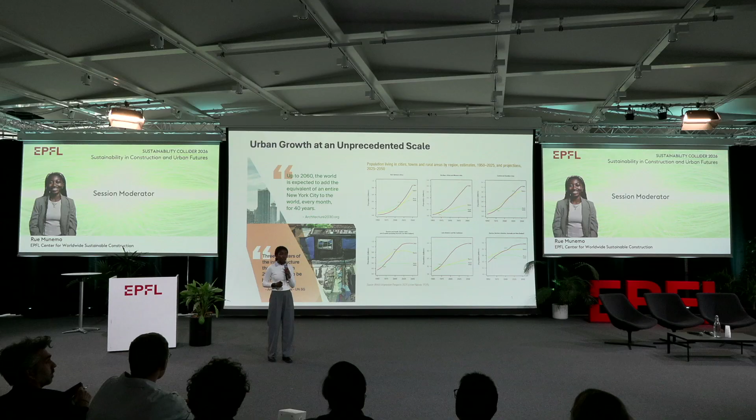The world is entering a period of unprecedented urban growth as well as population growth. At the moment, 50% of the world lives in urban areas, but by 2050 it will be 70% of the world living in cities. That's 2.5 billion additional inhabitants currently not living in cities, meaning cities are supposed to expand to accommodate these new inhabitants. Up to 2060, the world will be adding an equivalent of New York City in floor area every month for the next 40 years.

And 3/4 of the infrastructure that we need to build technically doesn't exist at the moment. And of course, this sounds like a daunting challenge.

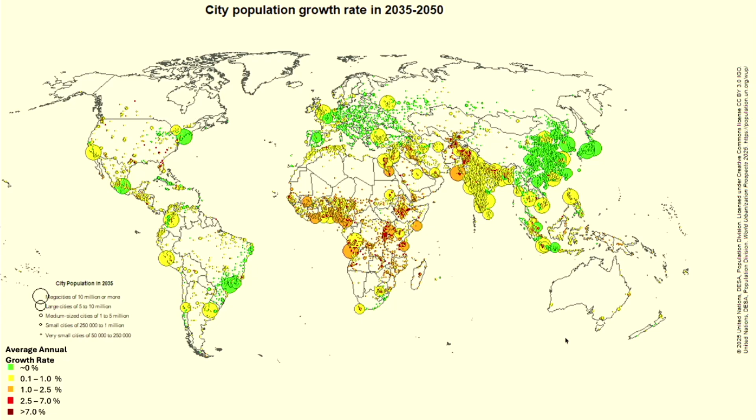If we look at the projected growth rate, majority of the growth will be in emerging markets and developing economies. That's why these conversations need to be two-layered. In developed countries, a lot of urban centers will experience minimal to no growth, so there we can argue build less, build better. But in Sub-Saharan Africa and Southeast Asia, where there's still a lot of growth that needs to happen, these cities still need to build the infrastructure to accommodate additional inhabitants.

So the main challenge that we are all aware of: the built environment contributes 42% of global emissions annually. Just take that in, 42%, whether direct or indirect. At the moment, there's been a strong contribution from operational emissions, which is the energy that goes into buildings.

But if we continue with business as usual, by 2050 the majority of those emissions will be from embodied emissions, meaning the majority of emissions from buildings over their lifetime would have already been accounted for before the building has even been used. Which is why it's important for us to consider embodied carbon just as much as operational carbon as we move forward.

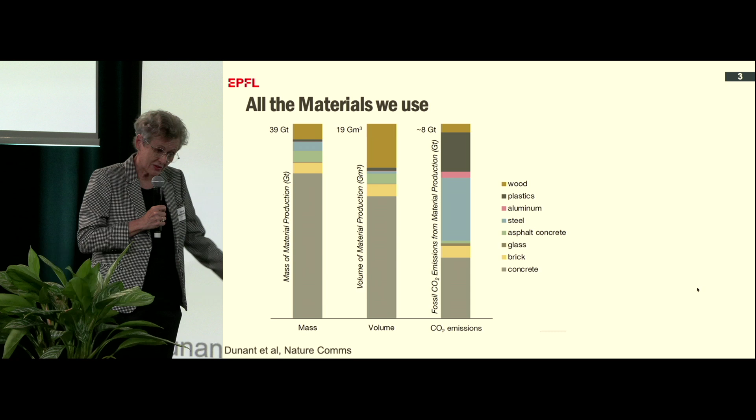And you'll see, even though cement-based materials account for 3/4 of materials, their contribution to CO2 emissions is proportionately much less. It's very significant, but it's much less. And we're not going to help the situation by turning to other widely available materials like steel, aluminium, etc.

Now then people say, well, we have to use more biomaterials, and I'll come back to that point, but the point here is how much can we produce? It's been calculated that replacing just 25% of concrete with wood, for example, would require planting new forests 1.5 times the size of India.

Now, that would be absolutely great, but even if we could do it tomorrow, this would hardly deliver anything by 2050, because typically trees take about 20, 30, 40 years to grow. And then, what's happening here? Yes, okay, then we have to look at where those materials are going to be consumed.

So this is a very interesting graph where we got the data for individual countries and made this plot of GDP per capita, which is like development state, versus cement use per capita. And it's very noticeable that all countries go through this kind of hump in their cement use, and then it comes down again. In fact, if we look back over the past 70 years, the amount of cement we're using in places like Europe has gone down, even though the population's gone up.

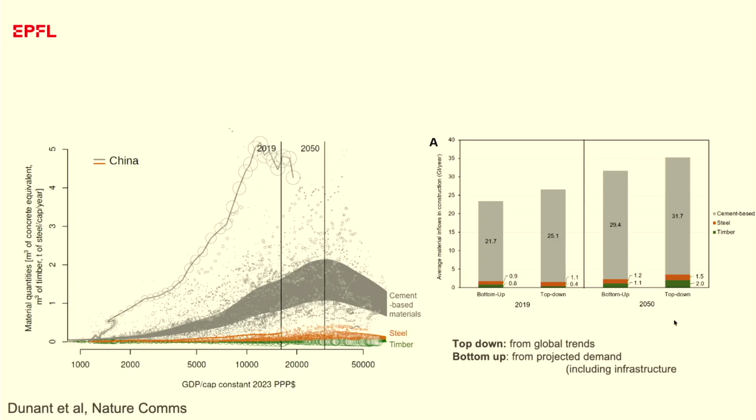This is taken from a kind of macroscopic, top-down analysis. If we confront that with a bottom-up approach based on published data for needed floor area, urbanization, etc., we get this calculation here. And what's interesting is that they're based on completely different premises, but they're pretty similar.

Because we have the data by country, we can see where this demand is going to be. And here you see 75% of the anticipated demand is going to be in regions which now have GDP per capita below the world average - that's to say, developing regions.

So what can we do about it? And here's the answer to the first question: what we can do about it is a lot. Because we have many, many strategies that can all add together to give very substantial reductions.

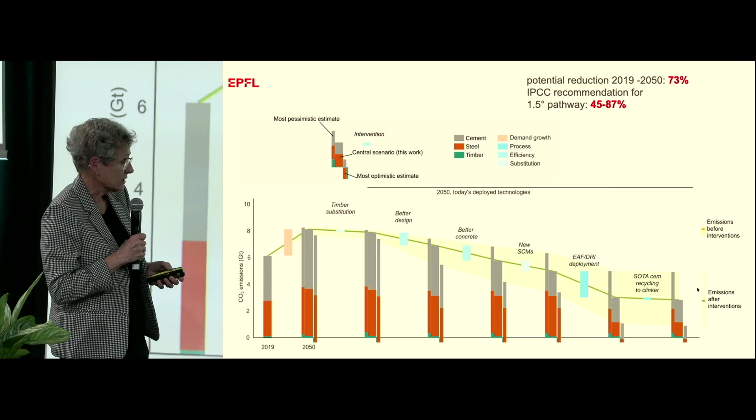A fairly small amount from timber substitution. We can do a lot with better design, which most people picked out. We can do an awful lot more by making our concrete more efficiently. We can do a lot by substituting materials in cement with lower carbon materials. And with steel, we can do a lot by moving away from blast furnaces and switching to electric arc furnaces. And we have this tiny amount from some recycling, but I hope you see that actually circularity doesn't really come in here.

Not to say we shouldn't do it, but this is what can happen in the global north - that's not where the big construction is going to take place. You can only reuse materials if they're already there.

The great thing about this - I didn't highlight it, but in fact here we showed that we can reduce, already by technologies available today, 73% of existing emissions from cement and steel, which is just enormous. And it's pretty close to what the IPCC says has to happen, which is between 45 to 87% in these heavy industrial sectors.

And what's, to me, the most important message about this is we no longer have to say to developing countries, 'oh, we have this global warming problem, so you didn't develop, you didn't benefit from that, you've just got to stay in the situation you are, because it will lead to more emissions.' If we follow business as usual, all these countries which are on the left-hand side of the hump are going to increase their demand for building materials, and in a business-as-usual scenario, their emissions would go up.

But if we implement just three things - better design, calcined clay, and better concrete - then all these countries, even though their GDP is increasing, they're developing, their emissions from cement-based materials can go down. That's a very important message and a very important thing to focus on.

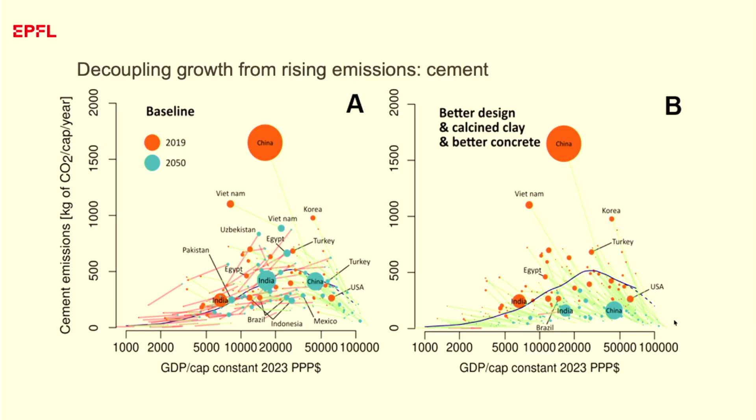One of those things mentioned here is calcined clay. This is behind the cement we developed at the Laboratory of Cementitious Construction Materials here at EPFL. It's simply the substitution of about half the carbon-intensive part, which is the clinker, by a combination of calcined clay and limestone. This has already been implemented in 33 plants worldwide, but the potential is much, much higher.

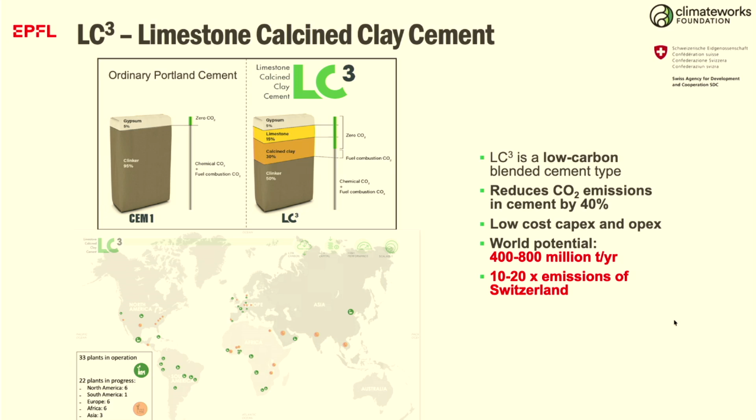The potential is to reduce emissions by 400 to 800 million tons per year, which, to put that in context, is 10 to 20 times the emissions of Switzerland. And that's what we should be caring about, because CO2 doesn't know any boundaries - so where we can have most impact, that's the most important place.

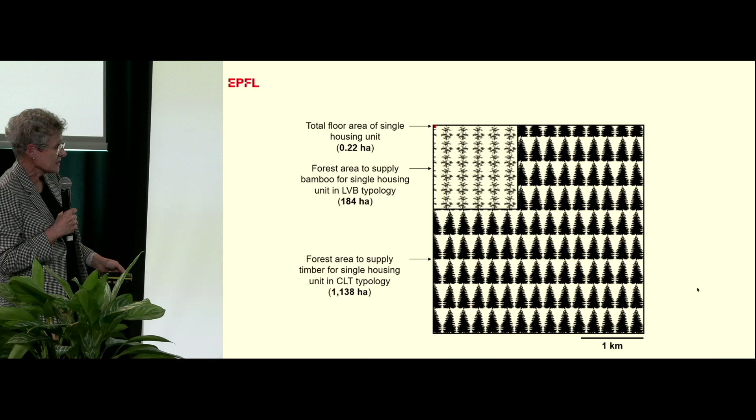As I said before, the problem is land use, because that's the size of your building, and that's the size of the bamboo plantation you would need to build that house. And that's the size, one square kilometer of forest you would need to supply that in timber. So if we've got those forests and we can exploit them sustainably, fine, but you can really quickly make the calculation. If people are living in urban agglomerations, then the land area isn't available.

And then we add this all together, the availability and the CO2 reduction potential, and you can see this is the different solutions evaluated differently, but by far the biggest savings come from implementing eco-concrete, which can be done in 100% of buildings, even tomorrow.

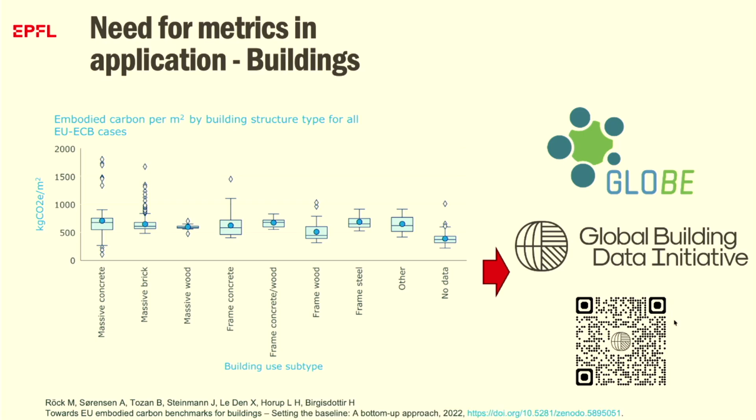And how do we evaluate buildings? Well, there's a poster on this, and my colleague's going to talk a bit more about it later, but we have to have good metrics. So what we're trying to do in the Center for Worldwide Sustainable Construction is bring all these parts of the puzzle together. Because unless we integrate the materials, the design, and the metrics to measure anything, then we can't realize these potential gains which are there.

So I hope that was fast enough, but we need to really keep remembering that CO2 is a global issue. It doesn't help to just solve little niche problems in our backyard. Speed and scale is essential. We have most of the solutions, and therefore we should be implementing them and not saying, well, this is not perfect, let's wait until we have something that's completely carbon neutral. Then we're going to be waiting around while we all fry. Low carbon concrete and design can instantly deliver a lot more than bio solutions.

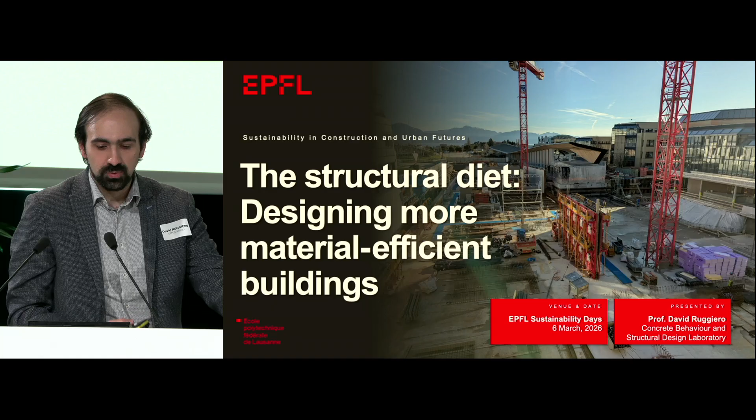And in essence, my argument is going to be that we're overbuilding. We're using more material than we need to, and that we need to find ways to economize and use less material right from the design stage.

So you know the statistics already, that the world is growing dramatically and that we need to build more, at least in some parts of the world. And buildings are a huge source of our global emissions, and about 10% of CO2 today comes from embodied carbon due to construction. That's the CO2 associated with the materials themselves. And within this, it depends by building, but you'd say on average 60 to 80% of that embodied carbon in a building is due to the structural materials.

So the role of structural design is critical if we really want to limit the carbon impact of our construction. We need to limit the amount of structural materials we use. We're talking about concrete, steel, bricks, timber, and we've already had a good discussion on the different types of structural materials, so I won't wade into the debate about which material we use. The point is that whatever material we're using, if we use less of it, if we use it more efficiently, then there's going to be a reduction in carbon footprint.

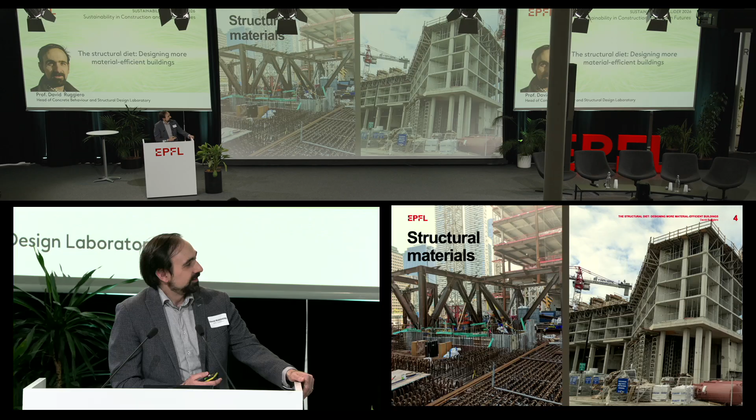I'll pause here for the first little quiz question. So, in a typical multi-story reinforced concrete building, which elements usually consume the largest volume of concrete? I'll wait 20 seconds or so.

Interesting. So it started out with floor slabs and then foundations caught up. Based on the data we have from many structural designs, this is three individual data sets from some structural engineering companies.

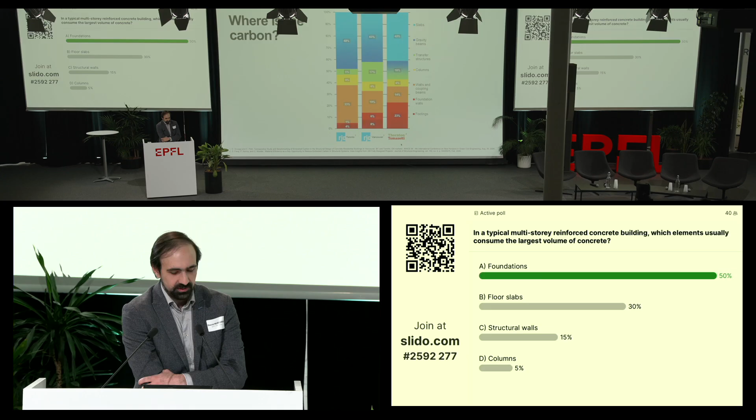Slabs and floor systems are the lion's share of the embodied carbon. Foundations and walls together also add up quite a bit. Columns are generally not a large share, and transfer structure, which we'll talk about in a bit, can also be significant. But definitely the single largest contributor is floor systems.

When we talk about the types of construction we're seeing, there's been a shift in the last couple decades in the types of buildings structural engineers are being asked to design. We have CAD, BIM, and finite element analysis tools that allow us technically to design very interesting, irregular, complex structures. This is being pushed by different architectural trends and sometimes issues of land scarcity in the places we want to build, and that's fine.

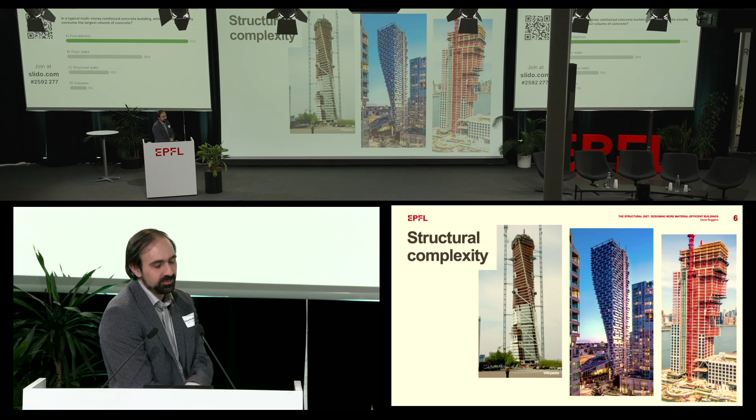But my point is, these buildings look like they want to fall down. It's because they do, and you have to do a lot of work to keep them from falling down. If you need to make this stand up, you need to put a lot of concrete and steel into it to counterbalance that, and naturally this comes at a price. So these kinds of buildings are heavier and more carbon intensive than buildings with a simple structural system. This is a general trend: if you introduce structural complexity, you increase embodied carbon.

A few examples: cantilevers are very popular architecturally, but very bad for carbon. I've done some other studies where we found there was a 50% embodied carbon premium for cantilevers. This is results from MIT, and this is something similar.

We don't have to look too far to see an example of this. So the new RTS building just outside has this bold second story floating floor, and to make this work, they needed huge steel trusses, not to mention the concrete walls to support them. The embodied carbon just from the primary steel framing, the trusses and floor beams of that level, not considering the concrete slab, comes out to about 300 kilograms of CO2 per square meter. For comparison, in a typical commercial steel frame building, the floor framing might be 50 kilograms of CO2 per square meter. So this is 6 times more intensive than a traditional building.

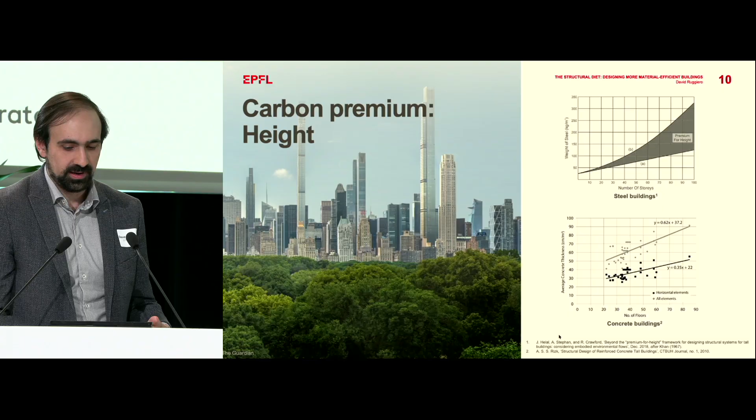If we talk about projecting vertically instead of horizontally, we talk about skyscrapers and pencil towers. It's been well known since the 1960s that building tall comes at a premium for materials and cost, and therefore also embodied carbon. The taller you go, the more you're fighting against wind, the more material you need to put in. Some of these really tall towers have walls up to almost 2 meters thick at the base to withstand wind forces.

There's also an interesting study others did about vanity height, the height of spires, and just the fact that you put a spire on top of your building will increase the embodied carbon of that structure by 10 or 15%. But I want to show something that's maybe more commonplace, more insidious because it's less seen. It's often covered up by the skin of the building, but it's there in the skeleton.

So this is what I'm talking about when I say transfer structure. A transfer slab or beam is something that allows a vertical discontinuity, so the force coming from a column above is shifted to new support points. This is done for many reasons. If you have a multi-use building, or a parking grid, or some infrastructure below, sometimes you're forced to do this. Other times, I'd say it's less necessary, but just done out of convenience for realigning architectural grids. But it has a big impact.

Some of these transfer slabs can be 2 or 3 meters thick. So you think just about the embodied carbon there, and you understand that, as we did in this study, you could have a 20 to 100% premium, an increase in embodied carbon over the entire structure, by introducing these transfer levels.

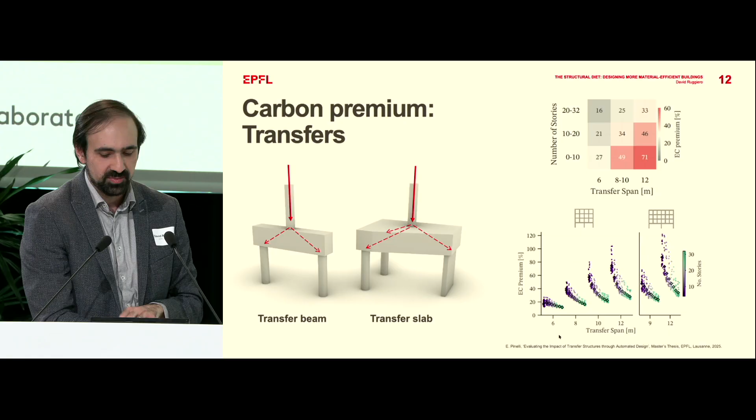Well, okay, so maybe you see what we were talking about a bit at the beginning. I want to return now to the topic of slabs. As you see, they are quite prominent in our construction, right? You see a lot of material. So now we can put the other quiz question, please: which of the following measures typically has the greatest influence on slab thickness, the amount of concrete we need to use in slabs?

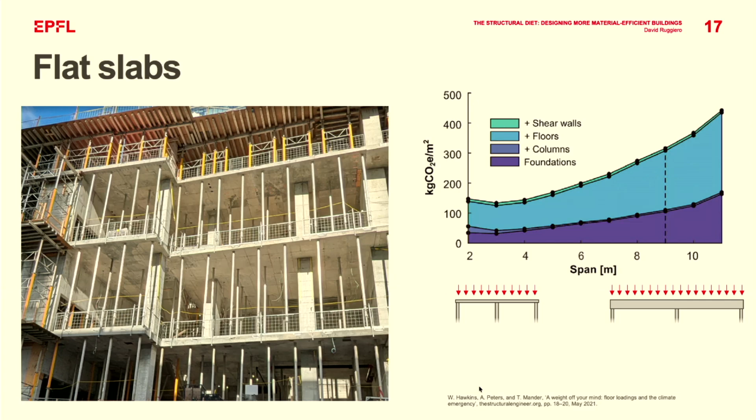So that's a good ratio, but the grand span here is purely architectural. It's not like we're building a bridge across a valley or somewhere where we need that span. So you can question, is this choice, is the creation of that space worth it? Would it have served its purpose just as well without all that embodied carbon? But ultimately, okay, we can accept that there's an artistic or cultural value to individual structures, and we want to talk more about the scaling factors of typical structures.

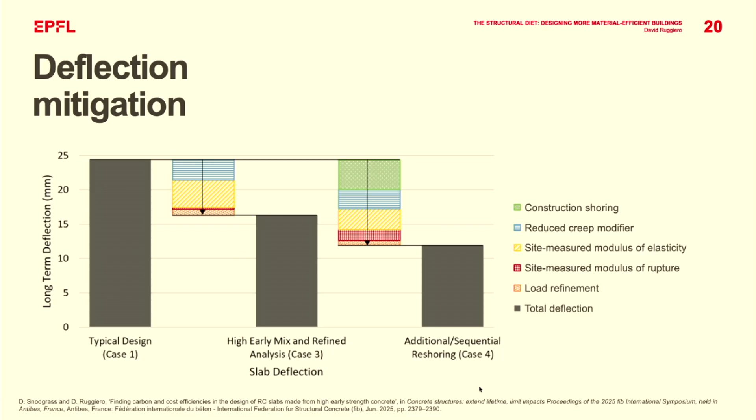So going back to floor slabs in general, we've also done research looking at ways of mitigating deflection of floor slabs, because many slabs are deflection governed. We make them that thick because they would otherwise sag too much. And there are things we can do, talking about construction sequence or materials, or even limestone calcined clay cement, which has some nice synergistic properties here because it actually tends to creep less over time, is what we're finding.

Or we can question the entire premise that flat slabs are very common in Switzerland and North America. Other parts of the world, not so much. This is one place where we have a divergence between the monetary economy of a system and its embodied carbon, because flat slabs are cheap, they're easy to form, but they have more embodied carbon than a ribbed slab, which is more complex to create.

So I've spoken about the carbon cost of structural irregularity and the importance, in particular, of floor systems. Last thing I'll touch on just briefly is a sort of more systemic factor that leads us to heavier building designs. This is really a simplified reliability basis for how we design structures, and there's always uncertainty in the world, and we can never design something to be 100% safe, so we assign a target reliability, a certain acceptable risk, and that's fine.

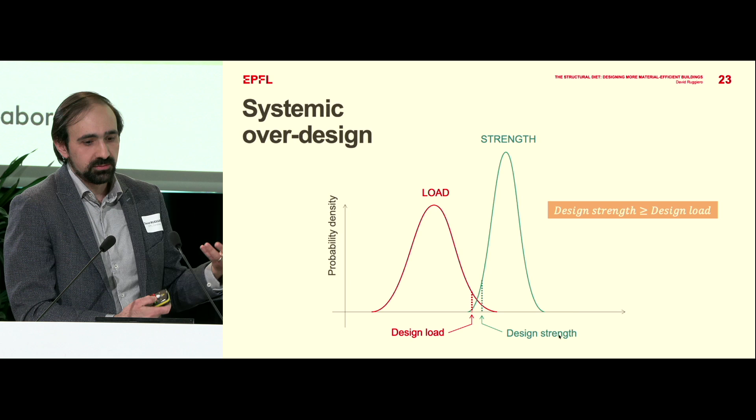Another study tells us that just by grouping similar elements, like similar columns together, well, they're not all going to be equally utilized, and you waste about 15% of the potential of the material by doing that. This also happens at the material scale.

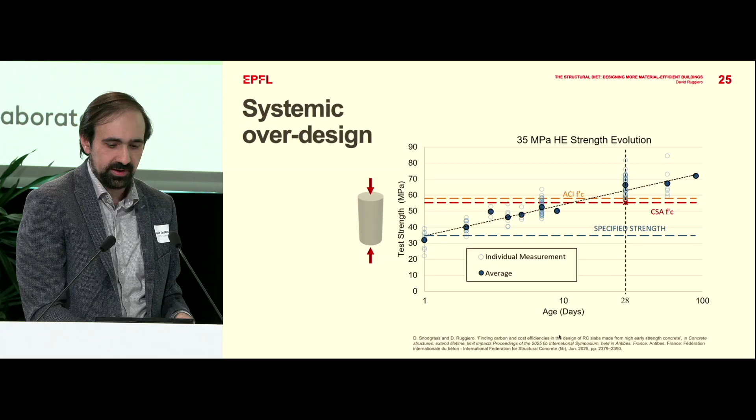This is a complicated graph, but basically this is data from one construction site where the engineer designed it with 35 megapascal concrete, the blue line, but the on-site actual rendered material is almost 60 megapascal strength. The engineer never takes advantage of this additional strength that they could, and we've shown that you can also reduce the thickness of the slabs by 10% if you account for this. It's just hard to know in advance because the concrete providers are a bit risk averse themselves and they will always shoot high.

Okay, so I've outlined the design decisions that can allow the structural engineer to have an impact on embodied carbon. I think if we want to slim down our buildings, we should negotiate shorter spans and more regular structural systems. To do this, we need buy-in from the entire design team and owners to think about embodied carbon early on at the concept design phase when you really have the ability to make big changes.

Individual engineers should also be aware of systemic over-conservatism and own their technical analysis and expertise to really improve their accuracy and thereby reduce their extra factors of safety. So this is part of the puzzle, but I think if we make improvements at the material and structural and urban scale, then I think we stand a chance to meet these decarbonization goals in the construction sector. Thank you very much.

All right, I guess there is hardly anything to add after all these presentations we have already seen. So, challenge climate change, decarbonization of the construction industry, of course a big topic as well for us as a company, and resource scarcity. The only thing that is for me quite interesting is that everybody really talks about climate change, and most of the people know as well about the size of the challenge.

Hardly anyone really talks about the resource scarcity topic and the real circular economy in the construction industry. I'm not sure whether you're aware of the mountains that the construction industry is moving every year in Switzerland. We use 70 million tons of construction materials every year, and a bit more than that, 70 to 75 million tons of construction and demolition waste. So if you open your eyes on the streets and watch the trucks, you'll realize most of them are transporting construction materials. And if you combine that with the fact that as a society in Switzerland we have a very low recycling ratio - although we believe we're quite good when we think about PET recycling, but PET is only 70,000 tons a year - it's actually quite sobering that we as a developed society are not any further than that.

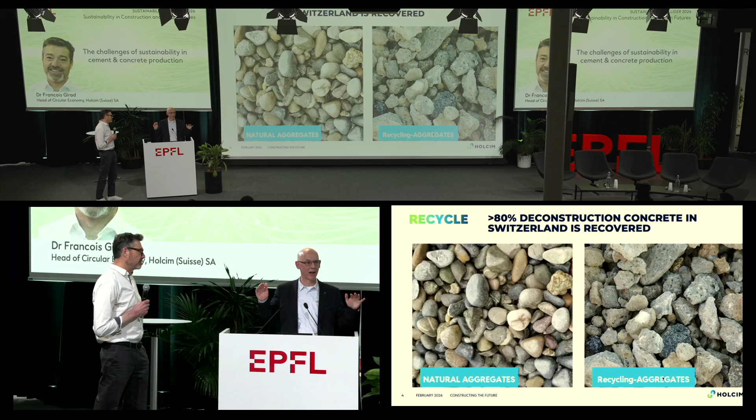I'll now go to one of the points in the question before, how many tons or what's the percentage of recycled concrete. So I'll go to the concrete level, and you'll be surprised. With all these figures it's pretty difficult to measure the amount of materials going where, but more than 80% of concrete is already reused. Deconstruction concrete is reused in Switzerland. Figures from the industry go above 85%. This is on the order of magnitude of PET recycling, plastic recycling, etc. So we're actually quite far there.

Here you see two pictures. On the left side, natural aggregates, and on the right side, recycling aggregates from deconstruction concrete. You see it's very clean - you don't have any contaminants like plastic, steel, cardboard, etc. So that is very high level, good quality material.

No, Clemens, you have a concern? Come on, you say bullshit. Look at these things, do you think this is high quality? It looks really scary, you know. It's nothing like a nice natural stone. Don't tell me you can make quality concrete with that. Sorry, I mean, we need critical people - I don't believe you, we need critical people like François, they keep us on our toes. Of course, François, you're right, this does not look like really natural aggregates.

What you see there, those gray phases, is actually cement stone - that's what happens when you harden cement with water. What's the quality of that material? It's porous. When you produce new concrete with it, it takes more water than natural aggregates. You need more cement, you need super plasticizers. So in the end you add cost, you add CO2 footprint, and you actually have less performance at the end of the concrete. But there is a solution.

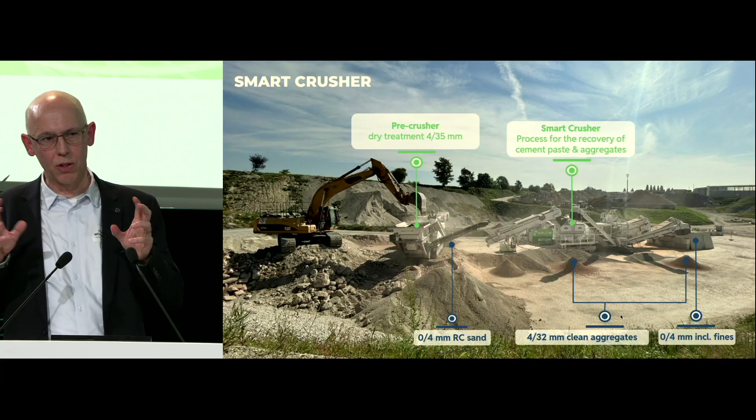Cement stone is quite brittle, and this crusher introduces only the amount of energy necessary to break the cement stone, but not the natural aggregates. The result is that we can separate aggregates that are almost as good as natural aggregates. So water demand goes down by 80%, no performance loss, no additional water necessary, no additional cement necessary.

At the end, we can also separate a high concentration cement paste. This is what you see to the left. So we can ensure cement to cement, concrete to concrete recycling. If we do this cement to cement recycling, we can save in Switzerland up to 400,000 tons of CO2. We produce, once again, clinker phases, something that can harden at the end. And this is substantial in Switzerland.

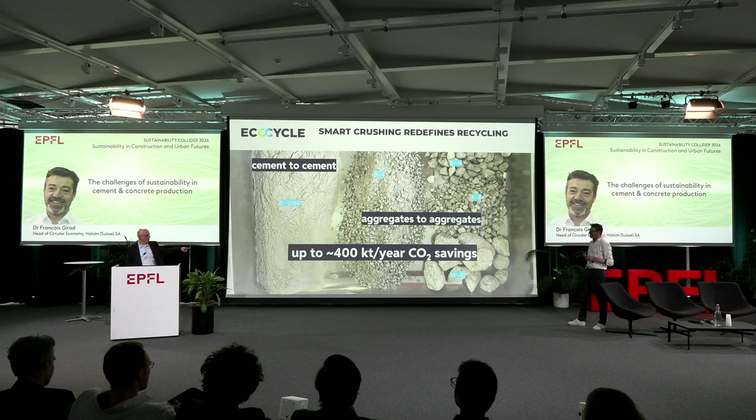It has been shown by Professor Scrivener that a circular economy will not solve the issue. It was, if I remember correctly, the least efficient measure. Of course, we are a mature country, not a developing country, so there's a built environment available, but we cannot destroy all the buildings in order to feed the need of concrete production. It's a bit greenwashing. Thank you, you realized I'm very fascinated about this technology, and you keep me grounded. Nevertheless, this is 20% of the emissions of cement in Switzerland that could be saved, but you are right, it does not solve the issue.

Here we come once again to what are the big figures in our industry. We use every year 40 million tons of concrete in Switzerland. Of course, that goes with economy, etc. And if you compare this to the 6 million tons of deconstruction concrete, you can use 1,000 smart crushers to treat the 6 million tons of deconstruction concrete. You will never make from 6 million tons, 40 million tons of concrete.

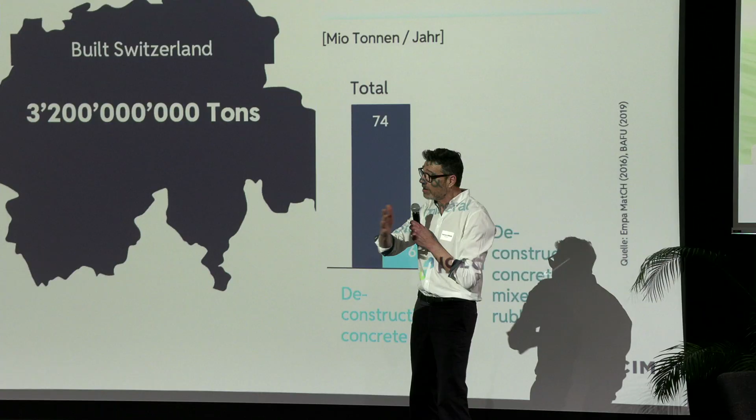So, François, you challenge me all the time, so what's the solution to that? What is your suggestion, what to do? But there's no Slido here. Maybe we should either destroy more buildings, that's really sustainable maybe, or what else, build less, stop constructing. I know some architects also from the EPFL, they say I don't want to build anything, it's not sustainable. Is this the solution? I don't know.

Your first solution is not a very good sustainability strategy to produce more waste, but I see the mathematical logic. With your second point, in a society that is still growing, with aging infrastructure, we still need to build, we need to satisfy the need. But we heard as well some answers before from the previous speakers.

We actually had a look at how efficiently our product is used in the final structure. And this was first not motivated by sustainability, but by the fact that we know if we want to reduce our CO2 footprint by 30% until 2030, we have to invest like 300 million Swiss francs here in Switzerland. So we asked, are there any more pockets to achieve something similar?

When we saw how our materials are used in floor slabs that we just discussed before, we found that in some constructions, up to 75% of the concrete used in the floor slabs is structurally not necessary. This is not what we heard before, because before we talked about structurally necessary additional concrete. But even if you build the normal way, without all these cantilevers etc., our floor systems use concrete very inefficiently. That's why we focused on some new startup ideas.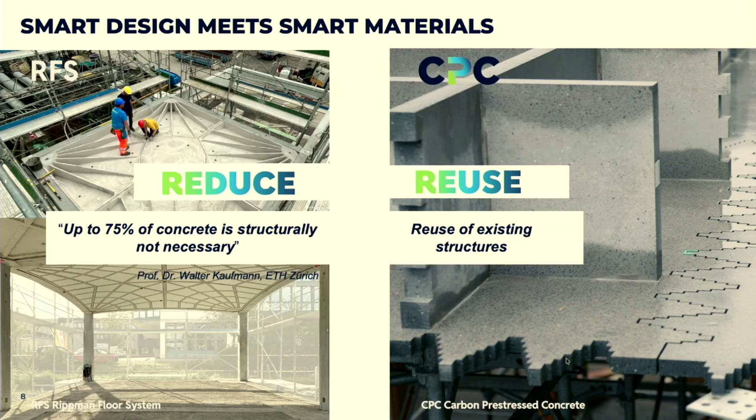Here you see two examples. Vaulted flooring systems, like Ripman floor systems, where basically through geometry you want to solve how the pressure is actually distributed. With this, you can remove like 70 to 75% of the material used in a structure, in a floor system. The other topic is carbon pre-stressed concrete, a startup that we bought a year ago. With this, you actually produce the concrete not with reinforcement steel, but with reinforcement carbon fibers. They cannot corrode, and by this, you can reduce the amount of material you use.

Clemens, well, we have 1 minute left. So do we really have something on the ground, or is that just a concept from a funny startup? For both.

The topic of the Ripman floor system, this year the first commercial building will be built in Zug. And for CPC, it's actually the material of choice for balconies, bridges, etc. Last year we built a showcase for a flooring system, you see that here, and this flooring system we are commercializing now. As I said before, material reduction of about 80%, you have as well a very big impact on reduction of CO2 footprint. That's something we will push into the market over the next years. Does it solve the CO2 issue?

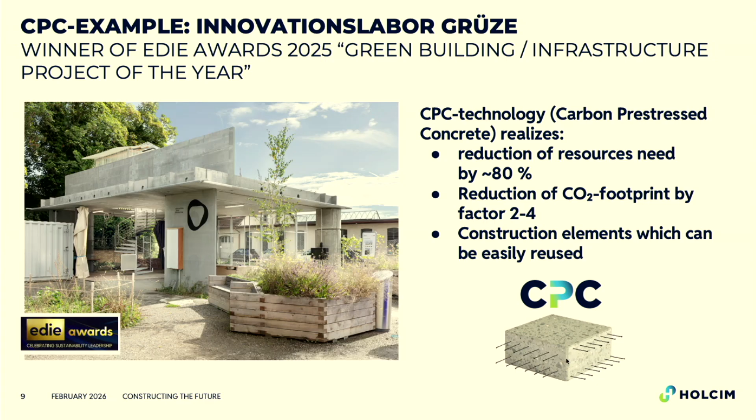In two words, because maybe there's no more time. In two words, yeah, let's jump to the end.

Yes. So does it solve the CO2 issue? No, we need to actually combine everything you saw, everything you heard as well in the beginning—using LC3 cements, using smart crushing, using these new ways to build and the new materials. If you combine it all together, we get a very big step ahead.

And my dream is that the next project we want to push is a big deconstruction project where we actually treat the deconstruction concrete with the smart crusher, use the materials to build carbon pre-stressed concrete plates, and by this build out of one old building two to three new buildings. And I guess with this we are then one major step ahead to a decarbonized circular economy in the construction industry.

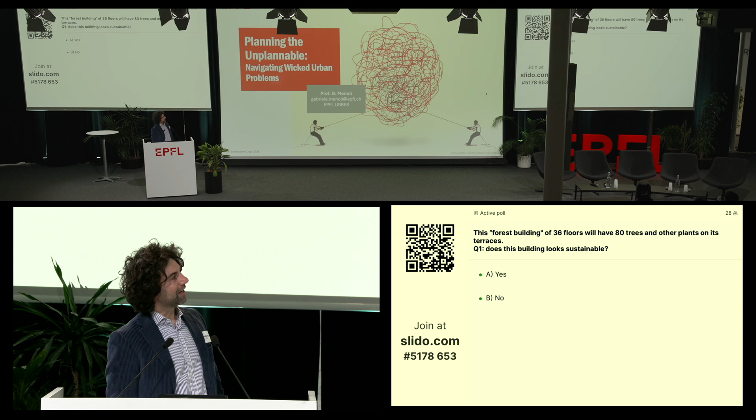Yes, no? Let's see. Okay, so mostly no. Okay, yeah, I think we can move to the next one, right? So I think most of, yeah, so there is a clear 74% for no.

I'll show you a picture of the building later in the talk, no worries. So, you all right? Good. Thank you very much. So I hope you will find the answer soon in the presentation.

Okay, so hello everyone. So I'm Gabriele Manoli. Thanks again, it's really a pleasure to be here today. And now I want to slightly change the focus and let's say zoom out a little bit from concrete and buildings, and look more at the challenge of urban sustainability, let's say in general.

And indeed, when I discussed with Frederick and Dimitris this event, they mentioned this idea of design, or lean design, inspired from manufacturing and engineering, as a way of how we should design the future cities, right, in order to make them more sustainable, more efficient, greener, healthier, and so on and so forth. So let me focus for a second on this idea and the concept of design itself.

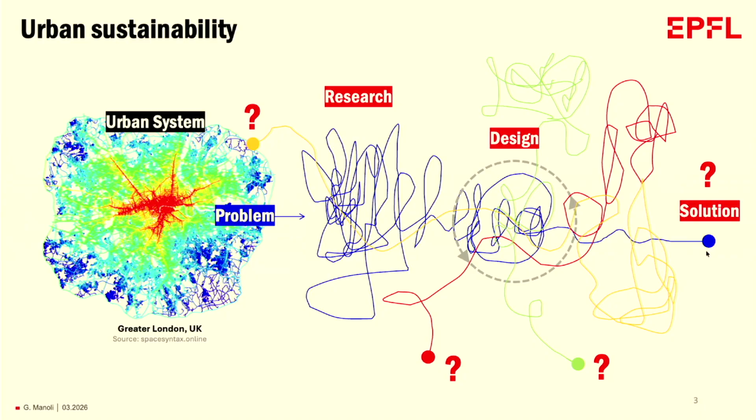But what I want to do today is basically challenge this idea a little bit in the context of cities and urban planning and urban evolution. Because what I want to argue is that unfortunately, urban planning and many issues related to our cities are not so easy to solve, because there is not a single or well-identified solution to a problem.

And I want to do it by focusing basically on two pillars of the ongoing debate on urban sustainability: urban greening on one hand, as you imagine from the questions, and this idea of urban digital twins. But let's start from the greening part, okay? So I think you're all familiar—this is, again, an example of a green building that you imagined a few minutes ago.

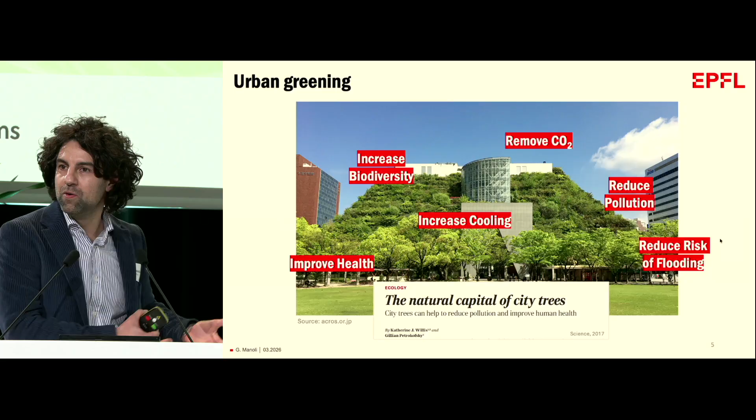So a building like this, for sure, it provides a lot of benefits and ecosystem services. Trees can remove CO2 from the atmosphere, increase cooling during hot weather, reduce air pollution and risk of flooding, and provide benefits in terms of biodiversity, and mental and physical health for residents.

So the first question is: is this cooling effect really enough? Especially during a heat wave, or in the context of future global warming.

But then we should also remember that the cooling benefits of vegetation are possible only if there is available water. Trees need water to transpire and to be efficient in cooling. This is clearly illustrated in London in 2022 during a heat wave, when temperatures were exceptionally high, so basically when cooling by vegetation was most needed. Yet because it was hot but also dry, plants were stressed, especially grasses and short vegetation, so the cooling effect of vegetation was definitely reduced compared to what you would have wanted or originally planned.

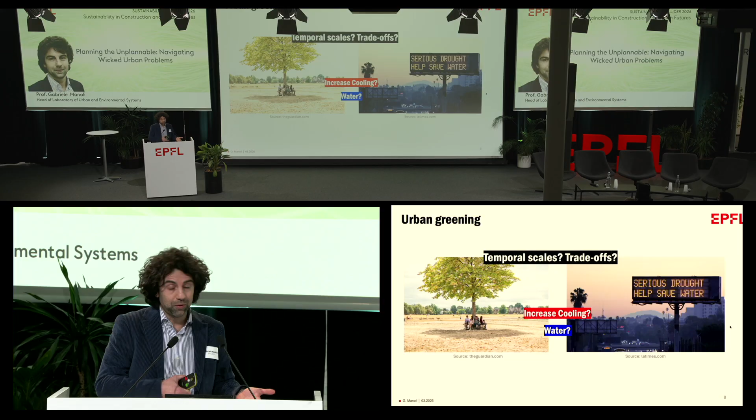So if you want to provide cooling through vegetation in cities during hot weather, you need water and irrigation. But this can create conflicts with other water uses. This is significantly a problem if you're in an arid region, like this image of Los Angeles, where every summer they put severe restrictions on water use for non-essential purposes, such as greening urban vegetation.

So we have a potential benefit in cooling, but we need water, with potential problems in certain places. We also need to target the most vulnerable population if we want to really provide benefit and reduce the risks. And here comes another problem.

Because vulnerability and risk depend on many factors. First of all, it depends on the age and gender of people, and whether they have any pre-existing conditions. So it really depends on the demography and characteristics of the population.

Another problem is that greening provides cooling outdoor, but people spend most of our time indoor. And that's another issue, because indoor conditions, especially during a heat wave, can be much higher than the outdoor ones.

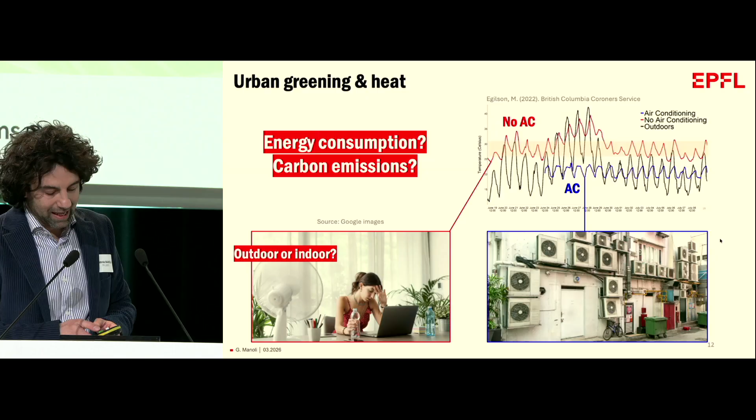So there are indirect benefits of vegetation, but there are also direct ones in the sense that, as mentioned, trees can uptake carbon directly from the atmosphere.

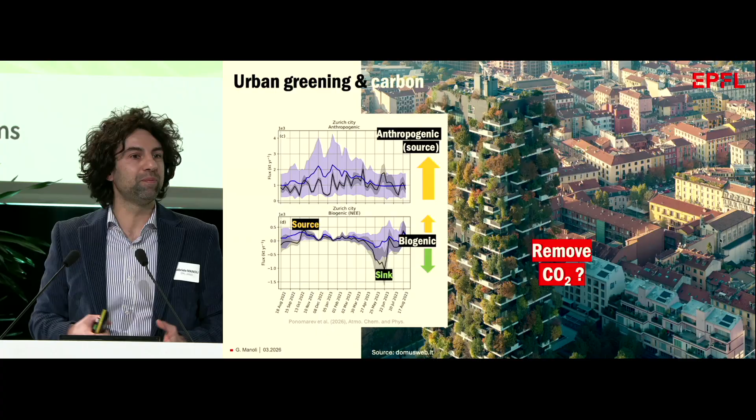But we also have to be careful in this case. First of all, we need to remember that vegetation is a carbon sink, but can also be a carbon source. For example, this is a recent study by colleagues at EMPA, where they quantified CO2 fluxes in Zurich. You see on top that anthropogenic activities are clearly the major source of carbon emissions, and below, the carbon uptake by vegetation, illustrated by the green arrow, which is negative. But you immediately see the problem: the sink typically occurs during summer, but for most of the year, the carbon sink by vegetation is either very small or can even become positive, meaning vegetation is not a sink anymore but actually a source of carbon into the atmosphere.

To connect to the question you've seen before, we should remember that even if we achieve carbon neutrality, ideally locally, this doesn't mean there are no embodied carbon emissions that we've seen and discussed before. For example, all the trees on a building like this, it would take around or more than 50 years just to offset the carbon emissions needed to construct the balconies, only the balconies. Just to put numbers in context. Again, this is just an example of a study on the topic.

This was mentioned already, but I think it's important to stress that we can try to achieve carbon neutrality locally, and vegetation can help in this sense, but we should not forget that all the activities, infrastructure and so on that we construct and use today, even all the technology we use, rely on carbon emissions that are emitted somewhere else. So we are just externalizing the cost of our lifestyles somewhere else on Earth. This is well depicted by this map of the carbon flows embodied in international trade.

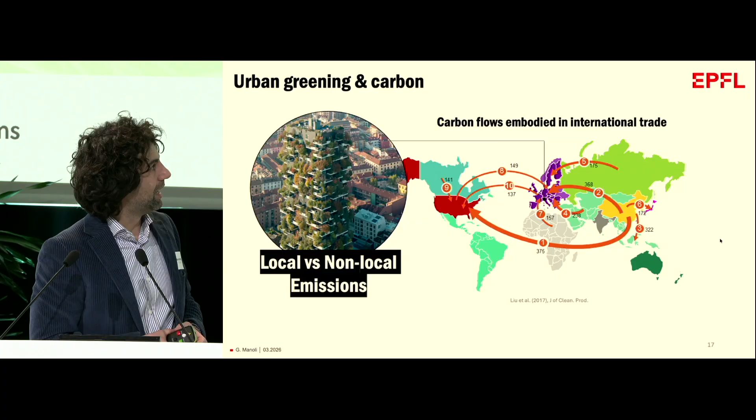So we have seen that there are pros and cons in vegetation, but I'm not saying we should not promote and use vegetation in cities, because they do provide a lot of benefit locally, from cooling to carbon removal. There is also significant evidence now that access and exposure to vegetation have positive effects on the physical and mental health of residents.

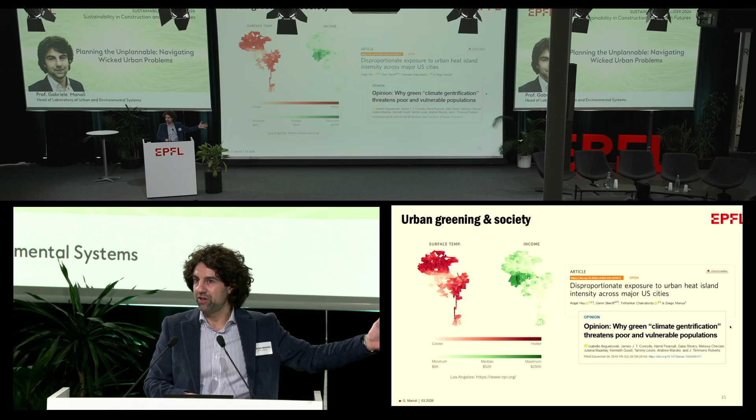But here comes another question: who is really taking advantage and benefiting from all this positive effect of vegetation? This is an important question to ask, because evidence shows that the poorest and most vulnerable populations typically are excluded from the local benefit of vegetation or greening interventions. This is well depicted by this image of Los Angeles. On the right, you have the income of different neighborhoods, and you clearly see the low-income neighborhoods, the ones with the light green color, are exposed to higher temperatures, shown in darker red on the left. Meaning the poorest and most vulnerable are the most exposed to climate hazard and risk.

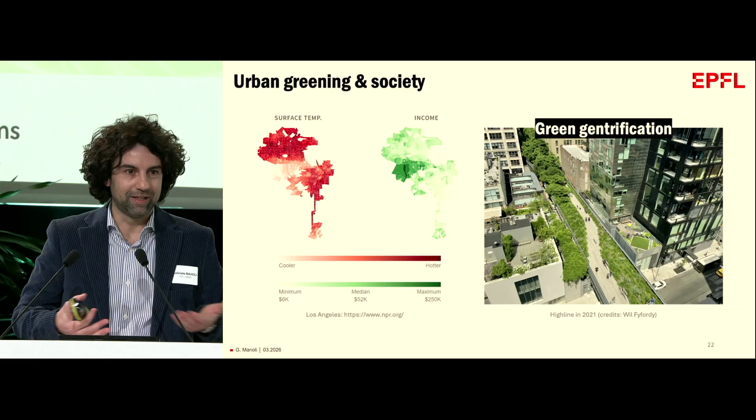This observation is linked to a phenomenon called green or climate gentrification. A typical textbook example of that is the High Line in New York City. What happened there is the city invested in a large-scale green infrastructure project to improve the life of local residents. But after constructing this, the price of land, the housing prices and property values, skyrocketed, increasing significantly.

And the local population, basically, which was low to middle income, was displaced at the advantage of real estate investors and wealthy population groups. So all these examples, I gave you many informations, ideas, and topics, but it was really meant to show you that cities and urban problems are more than the sum of their parts.

So whenever you introduce an intervention, you might have cascading or non-expected consequences somewhere else in the system. So just to recap, right?

We can introduce greening in order to improve microclimate and with the expectation of providing health benefits or reducing climate risks. But this really depends also on the exposure and emissions, which depend on the mobility, transport sectors, and the energy sector, and so on and so forth.

And all of this is locally, actually. And also mobility and greening modify and affect accessibility, which have then effect on house pricing and so on and so forth. So all of this has cascading impact on construction processes, but also demographic changes, segregation, inequality, and so on and so forth.

So the idea now, and the hope, is that with AI and digital twin models, we can try to solve many of these problems.

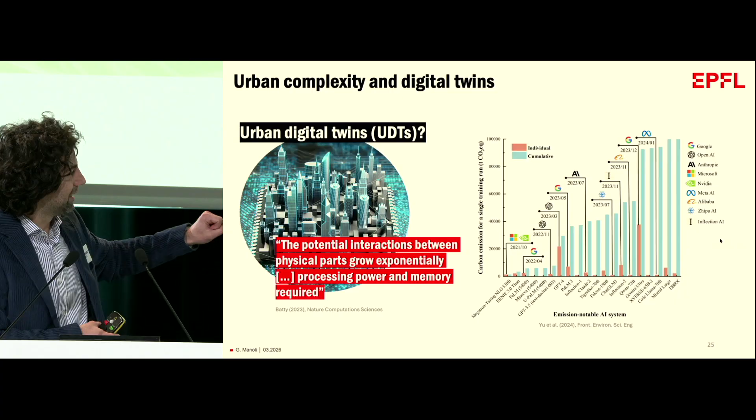And also, we can aim for more data, better models, better AI tools, but we should not forget that the processing power and the memory required by all these algorithms grows exponentially as we increase the number of variables and interactions. And this is clearly shown by this study here.

So the problem is that basically we're trying to solve a problem with the same thinking that created it in the first place. Because all this computation contributes to carbon emissions in the end.

So I think I've convinced you by now that urban planning, unfortunately, is a wicked problem. What does it mean? Well, it means that you have stakeholders which have conflicting goals. So now you have residents who want affordability and developers who may just want profit.

And you have the fact that every intervention on the system changes the system itself. So you green with a specific objective, but then you reshape the market, you change the migration and demographic patterns, and so on and so forth.

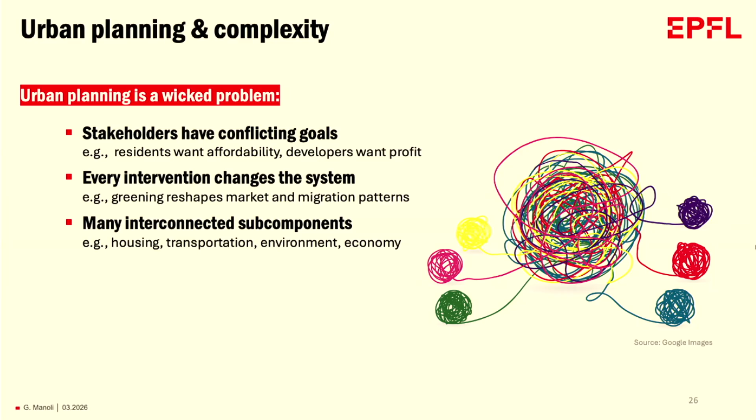And this happens because you have many interconnected subcomponents, right? So you have housing, transportation, demography, environment, and they are all interconnected with complex and nonlinear feedbacks. And all of this happens on long time horizons where you have a lot of uncertainty, right?

So demographic changes, technological shift are difficult to predict. So at the end of the day, there is not a definitive solution because the dynamics of the system are basically evolutionary in nature, in the sense that cities are continuously evolving and adapting and self-regulating in response to internal but also external forcings.

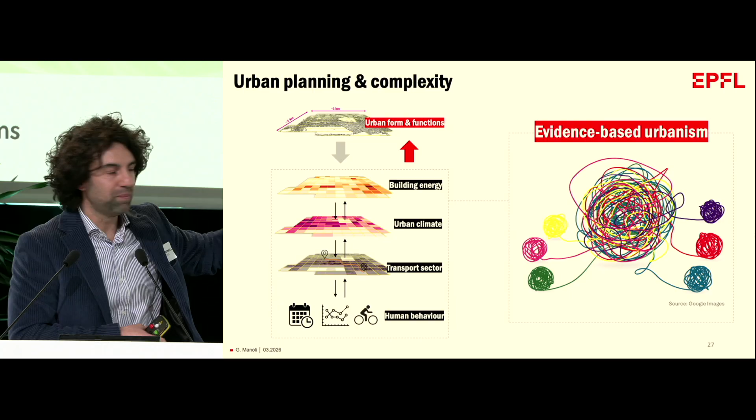So just to quickly conclude, at the Laboratory of Urban and Environmental Systems, we are trying to untangle these complex interactions that occur in cities, and we are developing models which are multi-sector, multi-scale, in order to really understand and explain the interaction between behavior, but also mobility, transport, energy, and so on and so forth, in order to inform planning.

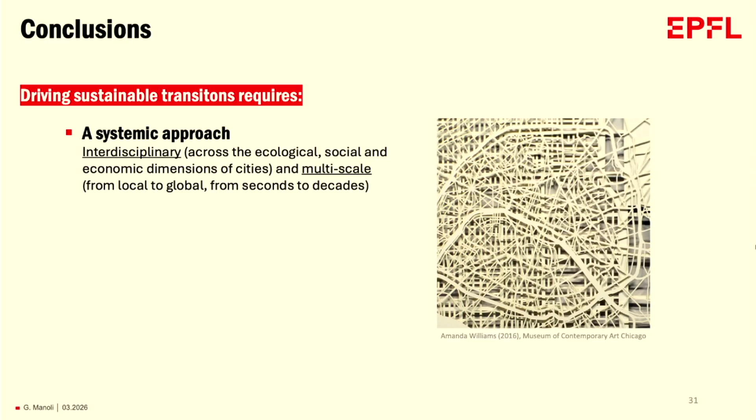So to conclude, my message today is that basically driving sustainable urban transitions requires a systemic approach, as was also mentioned at the beginning. So we really need interdisciplinary methods across the ecological, social, and economic dimensions of cities, and also a multi-scale approach that considers both local but also global problems, from seconds to decades or even longer time scales.

We need also an evolutionary perspective to the problem, because we need to focus on interaction and feedback loops and points of leverage, rather than strict optimization or selective services and operations.

And at the end of the day, we also need some shared values and bottom-up initiatives, because we really need to rethink our long-standing separation from the biosphere if we want to drive positive change for the future. Thank you very much.

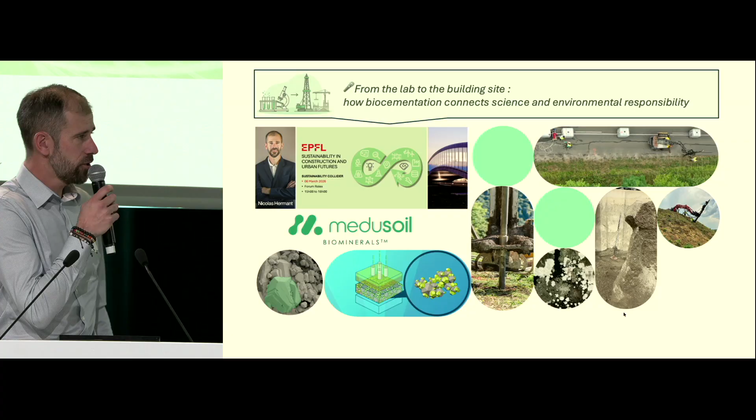Hi everyone, I'm Nicolas Hermant from the company Medusoil, and I'm very happy to be here today to present how to go from the lab to the field with an innovative and sustainable solution that is designed for today, but also for tomorrow's world, with more and more natural hazards and stronger environmental regulations.

I won't spend much time detailing the situation of our planet—I think we all know it if we are here today. We also know that the construction industry has a major impact on our planet and on CO2 emissions. But we all know, as has been said many times today, that cement and concrete are essential, necessary products. The point is definitely not to replace them, but to improve them, use them at the right place, and develop some alternatives.

Complementary approaches exist, and I'd like to present the one from Medusoil, which is based on nature, because at Medusoil we use biocementation.

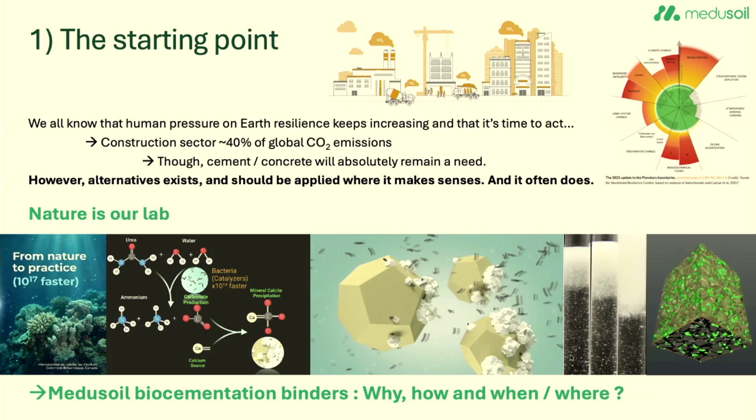Biocementation uses microorganisms that are able to precipitate calcite crystals, and these crystals grow in the mineral matrix, binding the particles together, bringing cohesion and reinforcing the soil, improving the geotechnical parameters. For instance, if I take some thin, non-cohesive sand and use a biocementation binder, at the end I've got something cohesive and strong.

This is not very new—anyone can do it with cement or lime. So then the question is, why use such a binder? Actually, today we are at the Sustainability Collider, so let's talk about sustainability.

This sample I showed you has been produced using a very low quantity of binder, and at the end, a very low carbon footprint. This is a major figure, and we are very proud and happy to be part of the climate protection effort.

But sustainability is not only about CO2 reduction. With our binder, we do not impact the groundwater, because we have a pH-neutral solution, so there is no alkalinization. We also don't impact biodiversity—we've certified our products as non-ecotoxic according to the HP14 Eurofins protocol. Those points are very important because, for instance, they allow us to use our binders in type S water protection zones in Switzerland or in Natura 2000 sites. So this makes a difference.

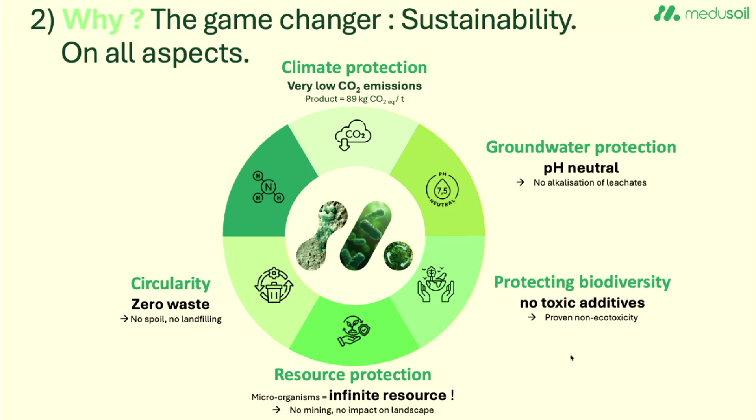With our binder, we do not impact resources—we protect them, because we grow our microorganisms internally in our bioreactors, so we have no impact on resources. Our solution is fully circular; we have zero waste from production to execution. Our only byproduct is now valorized as a fertilizer homologated by the Federal Office of Agriculture. Last point, we developed a nitrogen-free product, which is quite important since nitrogen is more and more regulated across Europe. So as you see, it's not only about CO2, it's about the global impact on sustainability.

Stepping back to the title, how to go from lab to field: of course you have to implement the right formulation of your product so that it's easy to use, can be injected, mixed with soil, even sprayed, and then it's just a question of scale-up—which we did. We now have our own factory and a mobile plant producing large quantities, helping to serve projects across Switzerland, Europe, and worldwide.

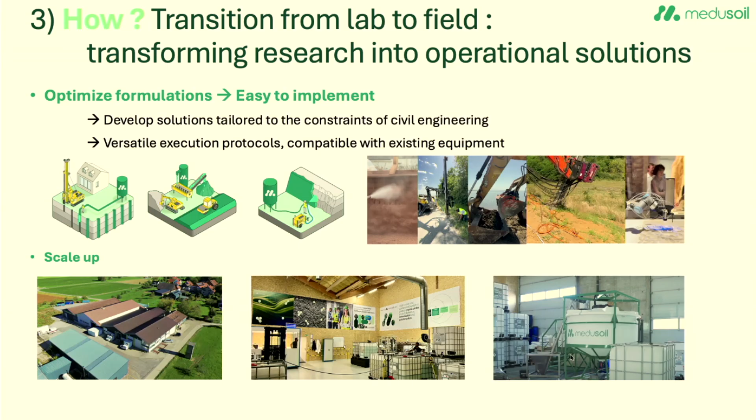So at the end, your question might be where to use these binders. Use cases range from protection of rivers to swelling clays remediation, peat soil improvement, and we're increasingly involved in projects to improve new materials by substituting part of the traditional binders with a binder that brings a better environmental impact on the final product. So it's not a proof of concept anymore—we are really in the real world with this solution, in applied engineering.

I hope it was interesting, and feel free to reach out if you have any questions. Thank you.

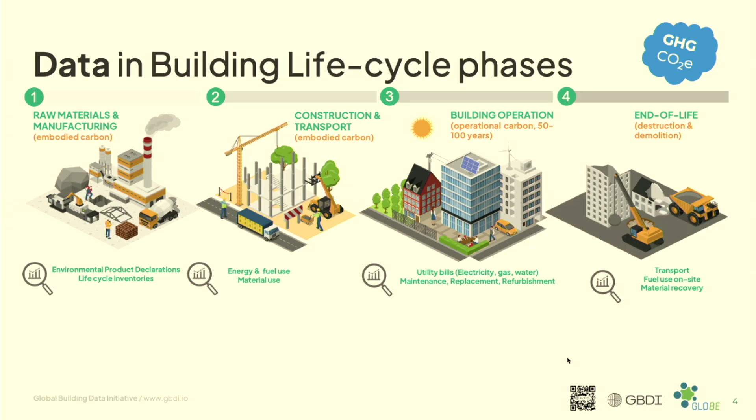But in all these phases, one key gap that is missing is the documentation of data. How much emissions are happening on the operational and embodied side, and how can we really understand that? That gap is very huge. We know there's a lot of information about materials, about how we transport things, how we assemble them, how we demolish them, but this is hardly documented in an efficient way.

And it's not only a gap we know is in the global north, but it exists across the global south. That is what Global Building Data Initiative does. We are working on consolidating this data through this initiative and looking into the life cycle assessment process to help make better decisions about the design of our buildings. Better data means better building and a better planet.

We are helping with this initiative to take better decisions, having data-driven insights through the work that we do. We are helping businesses to inform their data, how they can improve it, and also close that gap and make things easier for different stakeholders in the industry, and making better design decisions.

We have mainly 3 work streams in GBDI. The first is working on a harmonized open data building format, which will help different industry stakeholders exchange data with each other without barriers and understand it very easily. The second is the open source data platform - this is available now online, and we're using it as a means for people to share and exchange data in the Global Building Data Initiative.

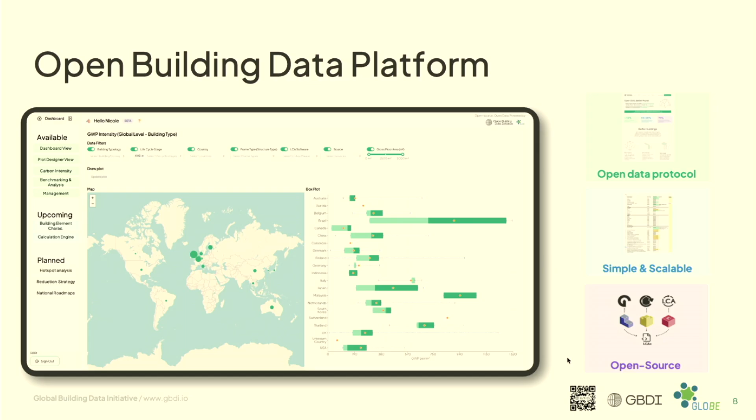We know global floor area is going to double by 2060, and this is a very huge problem. That is why in the Global Building Data Initiative, we have a very wide network of stakeholders we are working with. As you can see, we are expanding the geographies of what we are working on, and EPFL is one of the lead partners taking this initiative beyond the boundaries we are working in. So I look forward to talking further with you on this initiative and understanding your data needs. Thank you.

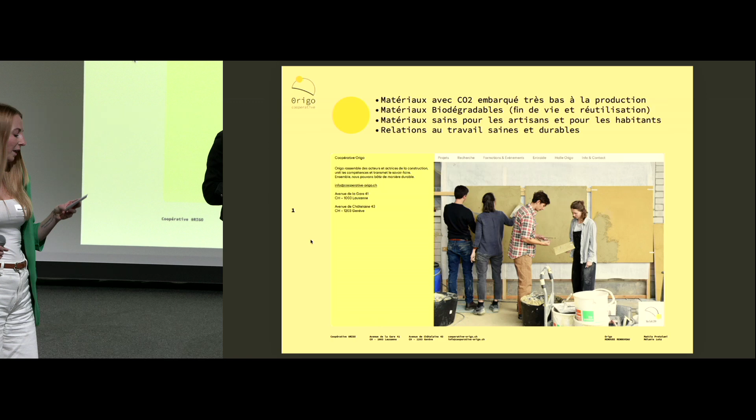At Origo, we do something very unusual. We bring together those who calculate, those who draw, and those who build, not just in the same project, but in the same cooperative. For us, sustainability is not just about material, it's about relationships, trust, and the know-how we built along the way. Together, with united skills, we shape a construction sector that is truly made to last.

Just really fast, we don't have much time. The Coopérative Origo started as an idea to answer a demand that is really growing in the region of Suisse romande. We realized there was hardly a way to answer this demand, which is constructing with bio-geo-sourced materials. We needed to change from a model of small craftsmen enterprises that cannot answer big projects, to something more federated.

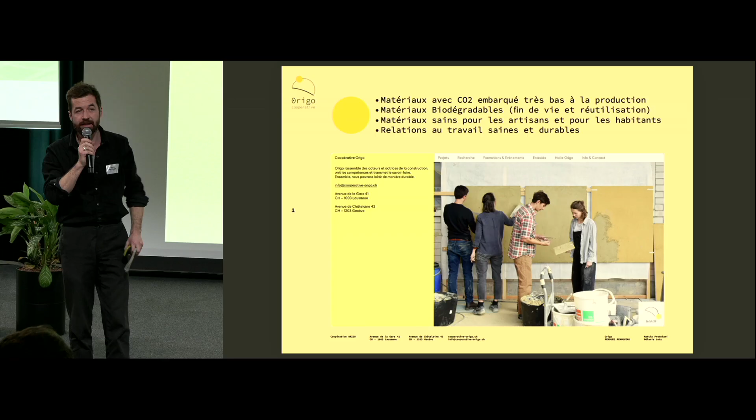So we created Origo. It's shaped along 4 poles, that's how we call them. We have projects, the idea of projecting and building with these materials, which we call bio-geo-sourced, from the French bio-geo-sourcé. Geo-sourced, many of our materials used in construction are geo-sourced, meaning things which are local and almost zero emission in their production at least.

So, natural stone construction, but especially earth construction, so every concrete which is clay-based in its binding. And bio-sourcé, everything with fibers, which also contain CO2 embedded, which we can store also in the building. Wood construction is of course bio-sourced. We also work with remploi, reuse of materials.

We do projects, we construct, we do consulting, but we build, we do conception and building, from conception to the building itself, because we have also craftsmen, engineers, and technicians in the cooperative. We do research. We research old and new ways of using old materials. We also do what we call certification for these materials.

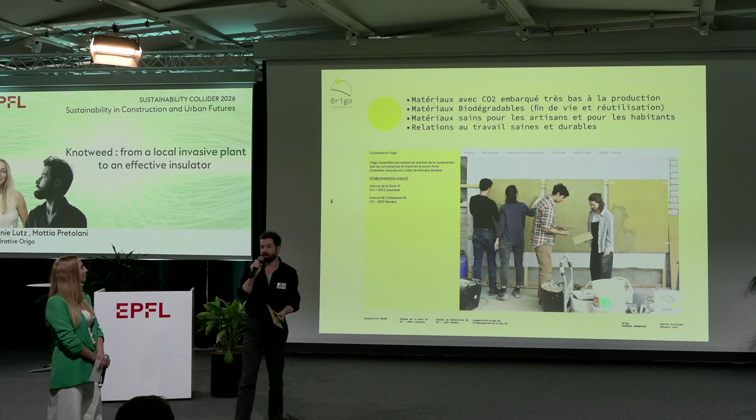We do formation événement, which is training. We train professionals. We realize that many architects start to design with these materials, but not many people can then build with it, so to train professionals is really important. And then we have the Entraide, an association of mutual aid and humanitarian activity and exchange internationally, where we exchange knowledge on this kind of construction.

I would like to say many things, but I think I have to pass. Maybe we'll just tell you a little about our research materials.

Imagine a plant that spreads like wildfire, that reaches 3 meters in a season, and that is almost impossible to eradicate. That plant is so invasive that the canton of Vaud mandates its destruction, and every year 100 tons of this plant is incinerated in French-speaking Switzerland. That plant is Japanese knotweed, and here's the paradox: we burn a plant that captures CO2, and we insulate our buildings with imported fossil fuel. We talk a lot about circular economy, but we burn valuable plant fibers because simply we don't know what to do with it.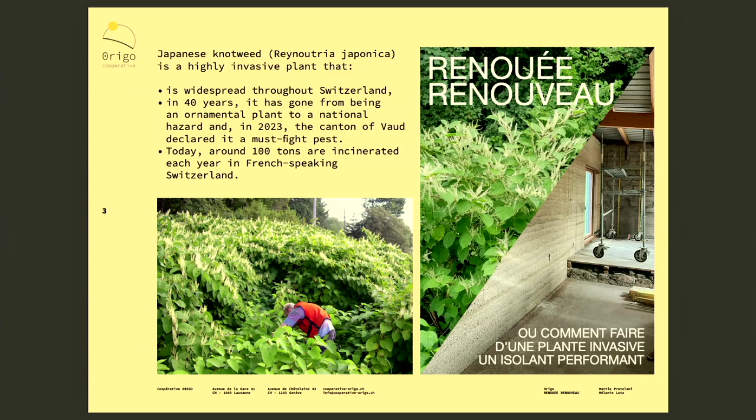So at Origo, we do. We are developing Renouée Renouveau, the first bio-based insulation material made from local knotweed, turning an ecological disaster into a climate opportunity. Of course it's the first material built with this kind of plant, because nobody wants to use it. You need almost a permit from the Confederation to be able to use knotweed at the moment.

But we show them by drying it up and binding it with clay, for example, instead of lime, which we do with hempcrete. We can use a material that has the same properties as hempcrete with lime, with all the benefits of earth construction, which is the regulation of humidity and air. There are many, many other good things, but not too much time to explain.

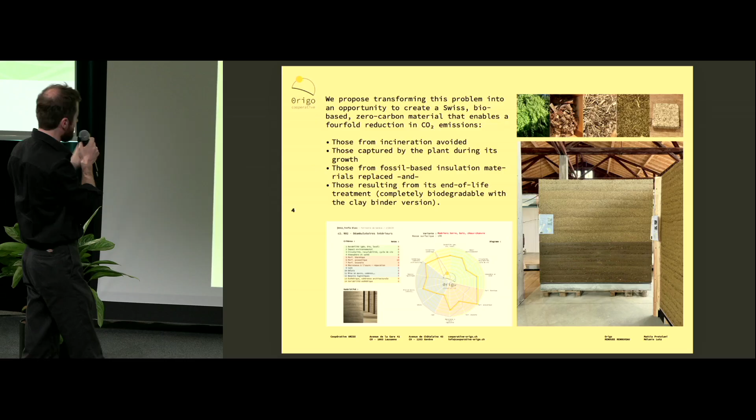What is really important in this specific project is that we use the knotweed, which normally has to be incinerated because we cannot use it in compost, since it grows everywhere. So we save the CO2 from this incineration, and we save the CO2 which is captured by the plant, by storing it in the building. The CO2 of petrol-based or cement-based materials, which we don't use, and at the end of the cycle, this kind of material, bound with clay, can be reused completely, 100% forever, without even needing the question of recycling.

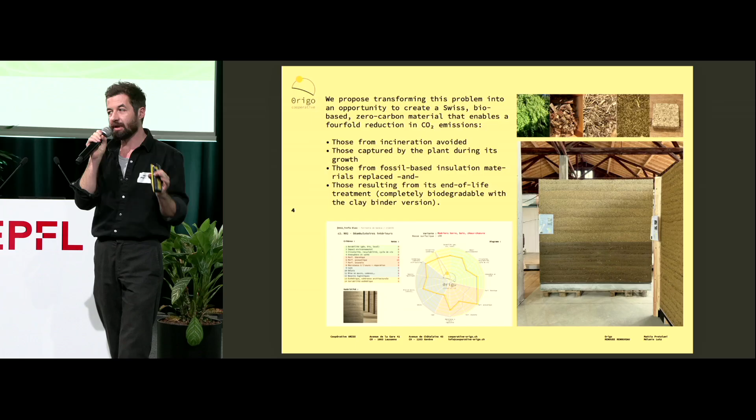There is no energy in recycling for this kind of elements. And I find it a pity that in all the analyses we've seen before, the only earth construction I've seen was always with concrete stabilization, which we don't necessarily need. Up to 4 stories we can build with earth construction without stabilization, but I didn't see it appear before.

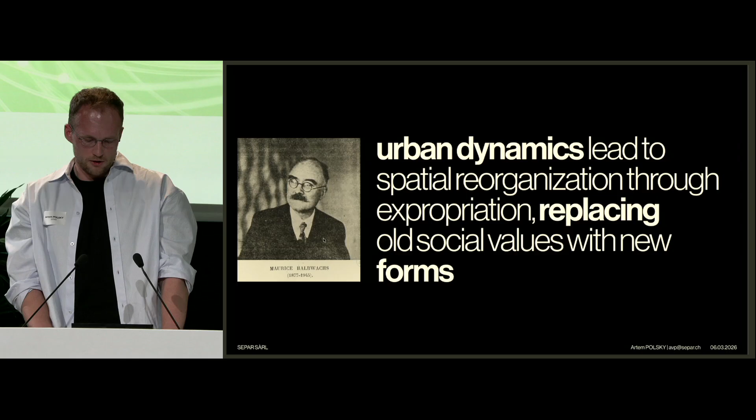But at the same time, if we look at cities, we see another dynamic. About 100 years ago, sociologist Maurice Halbwachs studied how cities changed over time, and his main focus was collective memory. He observed that every time a new wave appears in a society, the old values change. It could be a new generation, new political priorities, new economic situation. New values replace old memories and old values, and the city changes. He called this process expropriation.

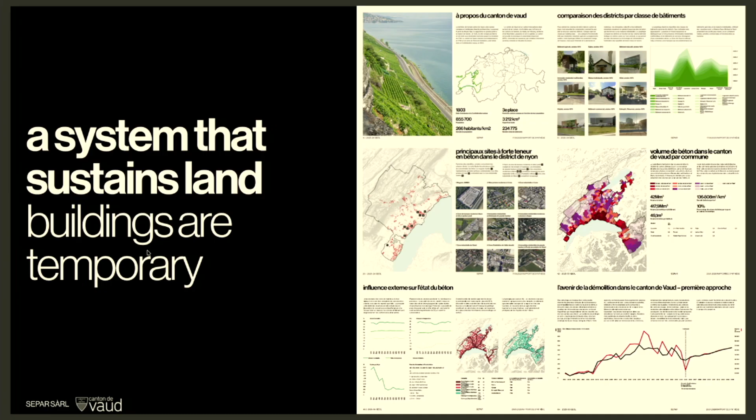And we started to track this process at SEPAR. The first project we did was a demolition map platform, because the outcome of each expropriation is basically the building that was demolished to be replaced with a new one. We built this platform to track and show how many buildings are demolished every day, and what volumes of materials come from this process. What we see is that it's quite a constant process, and with this technology we also consult large-scale portfolio holders. For instance, there you see a project for Canton Vaud, where we consulted them on urban mining strategies. We made an analysis of a building stock of 250,000 buildings, went through demolition waste reports, and built a simple prediction model for future demolitions.

One clear thing that came after this analysis is that land is usually more valuable than buildings and materials, and buildings are often demolished much earlier than the true end of life of these materials. So the only truly stable thing is land. For us, that means sustainability tends toward a certain resistance, but in opposition there is always this process of expropriation—something loses its value and needs to be replaced. So it's the nature of dynamics, and otherwise it's stagnation.

So if we look at a building level, there are sustainable strategies aligned with this opposition: a building loses its value and becomes elements. Next, elements become waste, waste turns into aggregate, and aggregate loses information and becomes something that can be used as a generic material in any possible scenario. So the system is very adaptable, but it also loses information, which is kind of the value in this paradigm of expropriation.

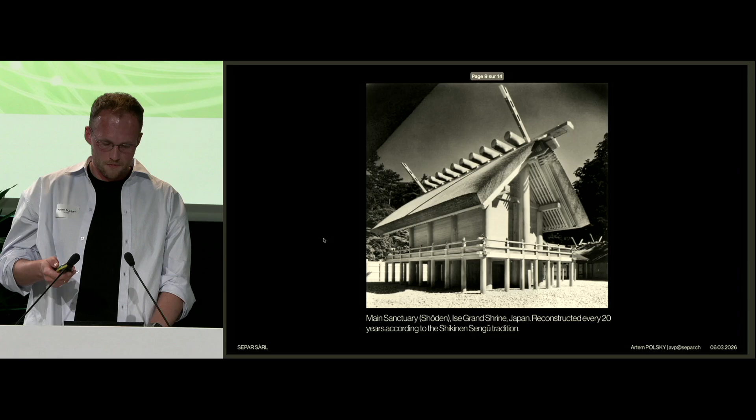But at the same time, there are historical examples where information is preserved. For instance, the famous one is a Japanese temple that is rebuilt every 20 years, and the builder participates in this building three times: first as a student, next as a master, and finally as a teacher. So when the structure is dismantled, it's reused in new construction. The important thing I like about this example is that the element contains knowledge about how to build again—the geometry itself contains information about assembly. So this idea is quite important for us and for the project.

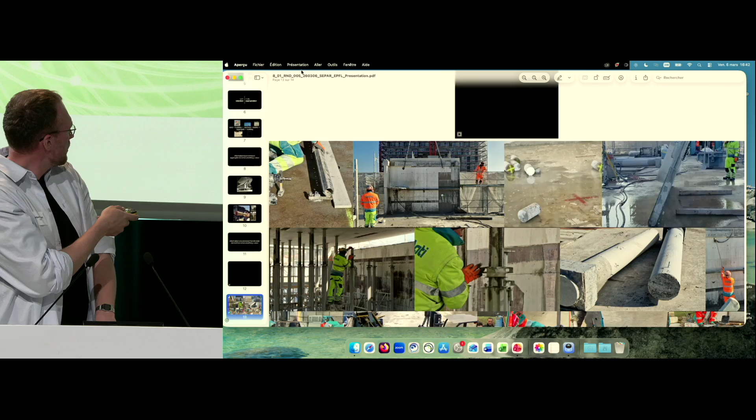Do you have an idea how to click on this button at the bottom? It should be 12. The previous one? Yes. And if you click on the button, is it clickable or?

It's basically the digital version of this slide, but if we won't be able to launch it, it's okay to go with the next one. And if you click on... okay, no, I think it's fine. I mean, all these images had a bit of movement, but if we're not able to do it, it's also fine to show it like that.

Our target is to create a scalable system where structural components can be integrated in new buildings without any compromises in safety. So we focus on concrete structures to preserve their structural information when buildings are dismantled. For this we develop and work on the industrial scale quality assessment of concrete structures, as well as the connection interface to make it assemblable with other construction materials.

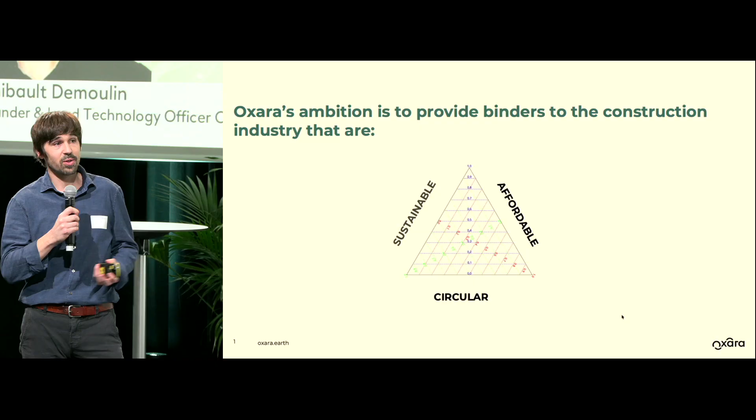These are the three criteria on which we base all our technical development and business decisions. Let me just go through what that means for us. Circularity is the basis on which we make the binder, because not only does it help preserve resources, but it also provides a material which is usually cheap, because we can see it as cost negative. The cost of landfilling is saved, and we can have a cheaper component of the binder like that. It also supports affordability, and if these waste materials are not over-processed, they are also sustainable.

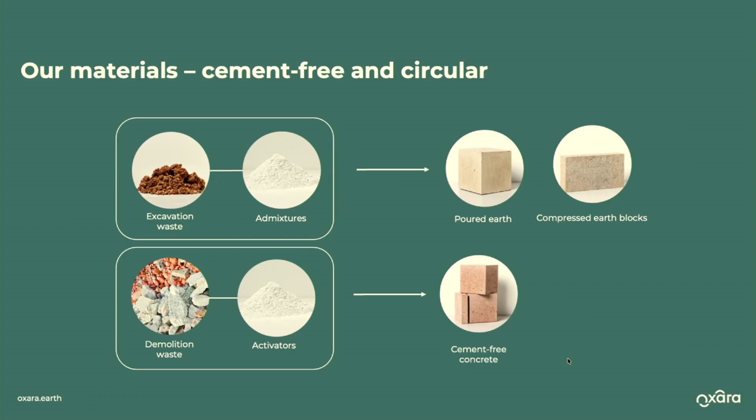Based on that, we have two different lines of products. One which is based on excavation waste, which is basically soil and clays, and one which is based on demolition waste. When processed and mixed together with appropriate activators or admixtures, we can have a binder that can be used for different purposes. If we use excavation waste admixtures, we can make a material which is poured earth, similar to concrete in its workability but based on clays, or compressed earth blocks. If we use demolition waste with a proper activator, we can make a cement-free concrete.